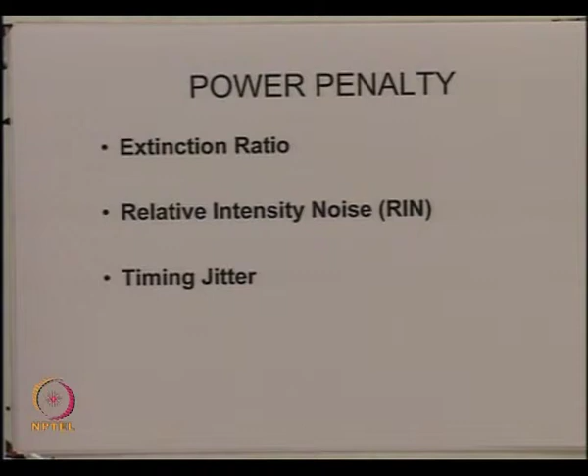So in this lecture, essentially we investigate each of these power penalties. Of course, when one power penalty we are investigating, we assume that the other degradations are not there. So at a time, essentially we account for power penalty due to one effect, and then we say total power penalty will be the sum of all the power penalties in terms of dBs.

So let us first look at the first power penalty, which is power penalty due to the extinction ratio. So here what we are saying is that when the 0 level of the data is transmitted, the optical intensity is not 0.

Now there are certain reasons for that in a practical system. Firstly, if you recall, when we talked about the optical detectors, we had something called the dark current. This is the current which is because of the ambient light falling on the detector. So even when no optical signal is transmitted, you will always have some light received, and that essentially gives you a small DC current corresponding to the 0 level of the data.

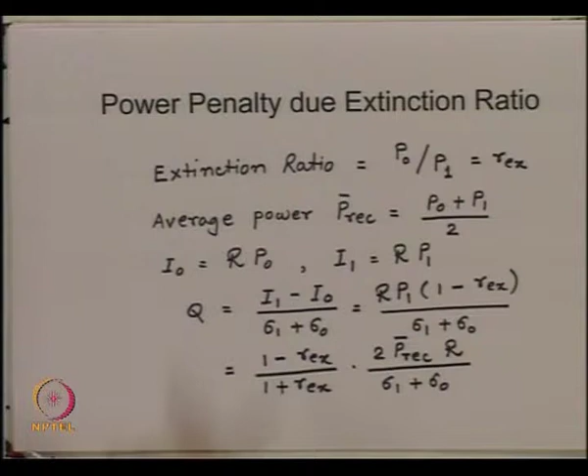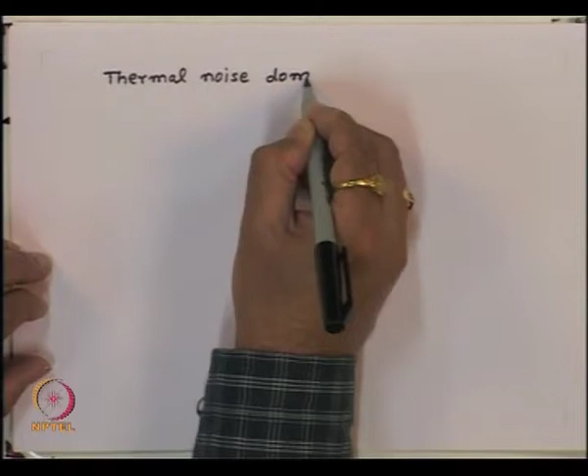Now, if we assume that the receiver is thermal noise dominated, then essentially the quantities sigma 1 and sigma 0 will be approximately equal to sigma t. So, under the assumption that my receiver is thermal noise dominated, we can get sigma 0 approximately equal to sigma 1, approximately equal to sigma t.

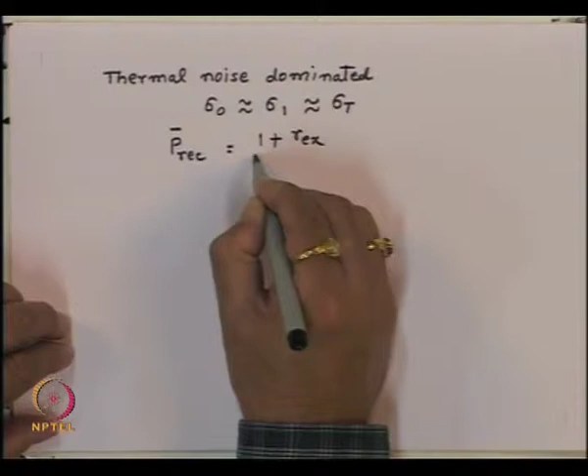And then in this situation, we can get the average power required. This we can get essentially by inverting this expression. So we can get the average power received, which is 1 plus REX divided by 1 minus REX, times sigma t Q divided by the responsivity.

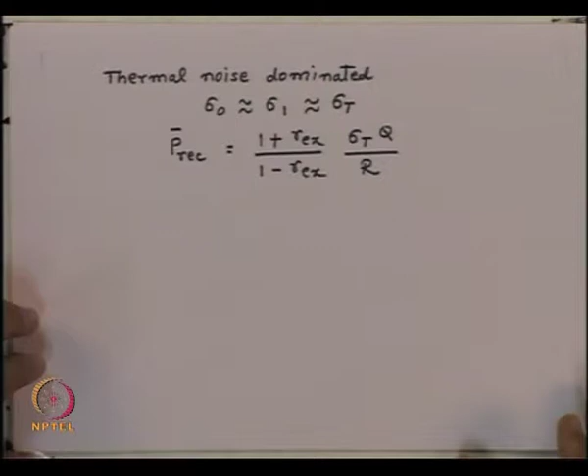So now, if the extinction ratio was 0, that is the ideal receiver, then we would require the average power in the data corresponding to REX equal to 0, which will simply be sigma t Q divided by R. Whereas now, when the extinction ratio is finite, you will require a little higher power P REC compared to the ideal situation.

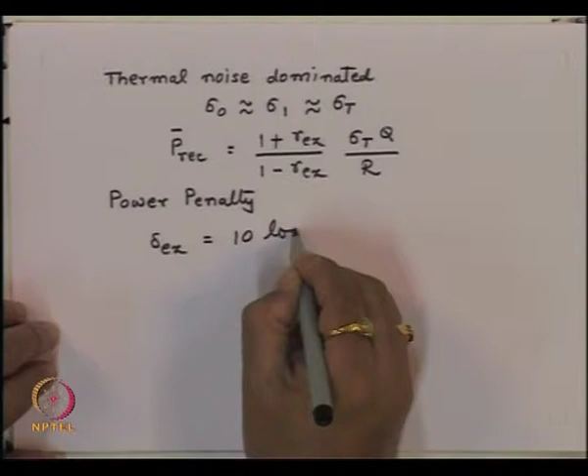So the ratio of P REC for a given value of REX compared to when REX was 0, we call the power penalty. So we can define the power penalty, denoted by delta Ex, which in dBs will be 10 log of P REC for a given value of extinction ratio divided by P REC for 0 value of extinction ratio.

So this quantity is a function of REX, that is what we are writing here. So substituting now for this quantity, P REC at 0 will be nothing but this. So we get the power penalty in terms of dBs, that will be 10 log of 1 plus REX divided by 1 minus REX.

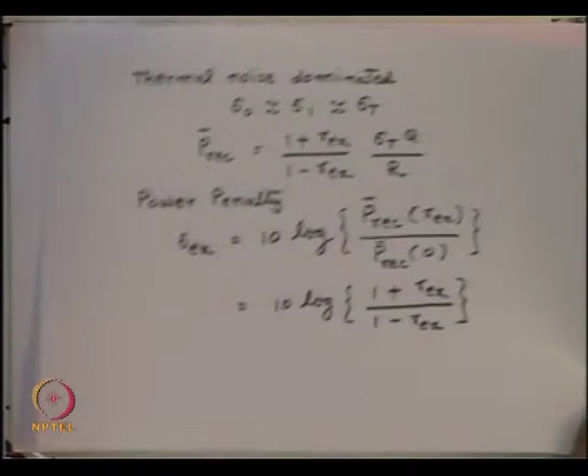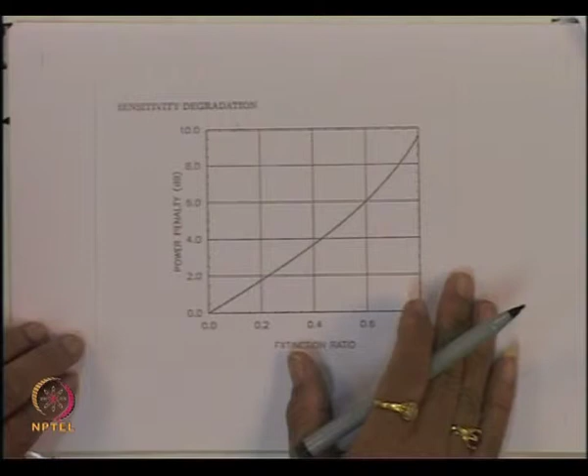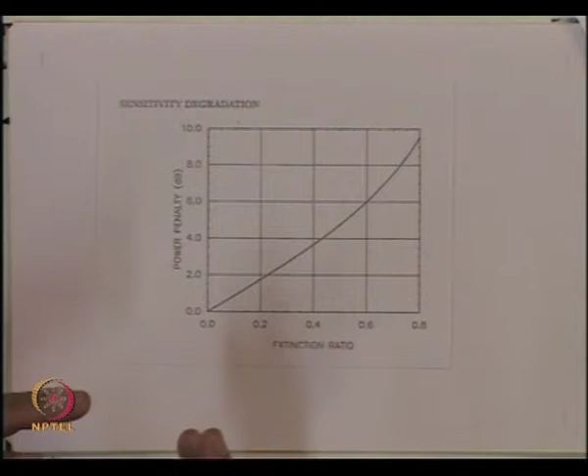As we can see, for an extinction ratio of about 0.2, we have a power penalty typically of the order of about 2 dB. And if you have extinction ratio of 0.4, then the power penalty is about 4 dB and so on. So if we say that for a receiver, the 1 dB power penalty is probably acceptable, then we can get the corresponding extinction ratio, that will be approximately 0.12.

So from this plot, we can get the numbers that this quantity delta extinction, that is equal to 1 dB for Rex of 0.12, and this will be as high as 4.8 dB for Rex is equal to 0.5.

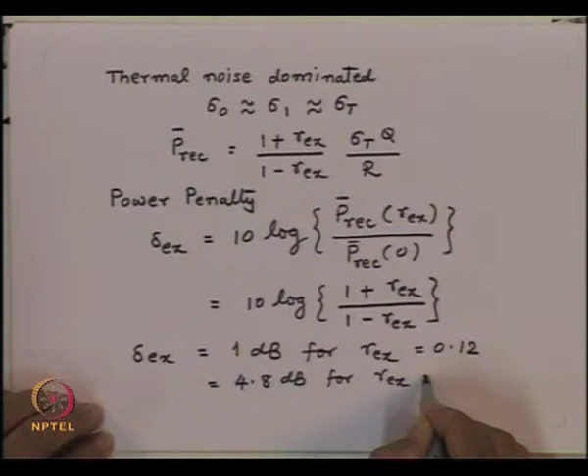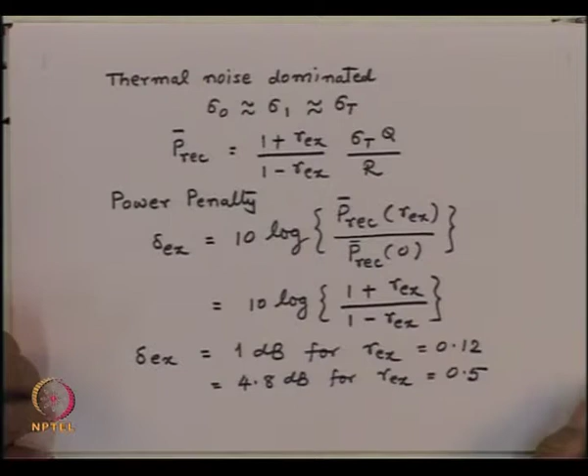Typically, the extinction ratio would lie in this range. So you will have a power penalty corresponding to the extinction ratio, which would be of the order of about a dB in the system. So this is one of the power penalties when we design a practical receiver.

The second power penalty which we have is the power penalty due to relative intensity noise. If you recall, if the pulse has to be transmitted like this, because of the relaxation oscillations and all other noise present in the laser, the signal does not go like that. The signal essentially goes something like this.

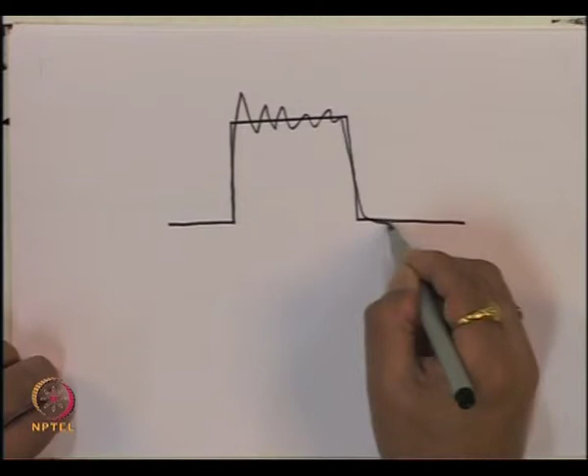So we are having some fluctuations in the optical intensity corresponding to the one level. This is the fluctuation which is called the relative intensity noise, and one can see that this effect essentially is a multiplicative effect, because this fluctuation which we are going to get into this amplitude will be proportional to the amplitude of the pulse.

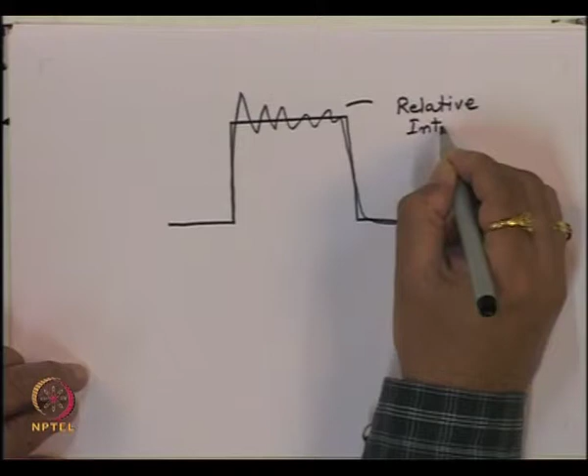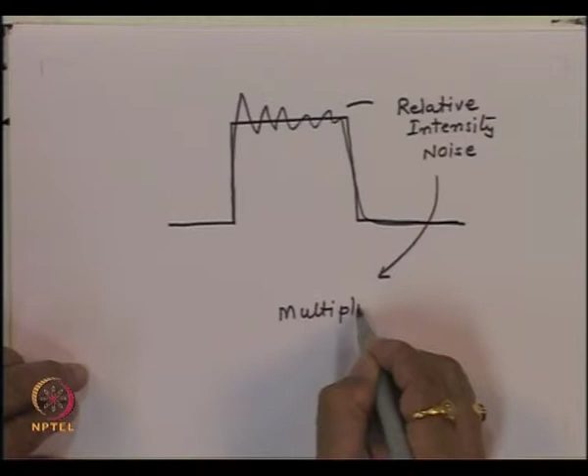So this noise, which is the relative intensity noise, is a multiplicative noise, because this noise is proportional to the amplitude of the pulse.

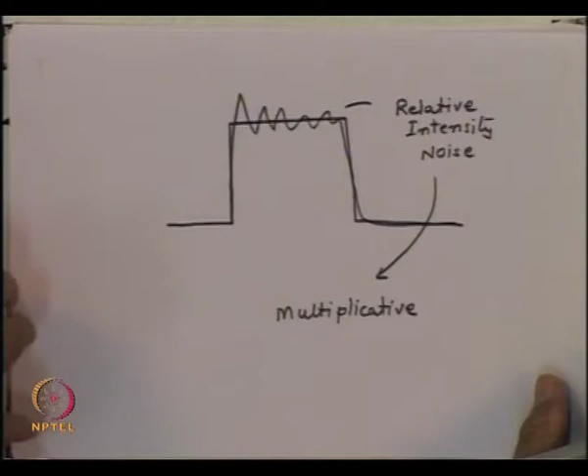So what we do is we define now the variance for the relative intensity noise, and then treat this noise in addition to the noise which is present because of the shot noise and the thermal noise. And then we can ask a question: because of the additional noise which is there due to the relative intensity fluctuations, what will be the extra power added to the system to get the same BER.

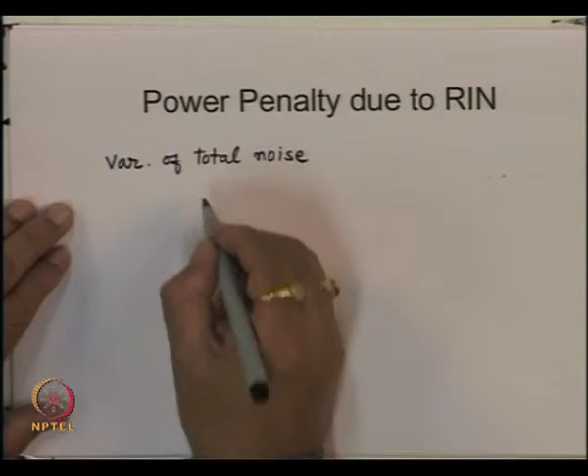So we define now the variance of the noise, which is sigma square. Let us say this is the variance of the total noise. Sigma square, that will be equal to sigma shot noise square plus sigma thermal square, plus the additional noise which is the relative intensity noise, which we denote by sigma I square.

Where sigma I we are denoting by the responsivity and the average value of the change in the input power. So this quantity is a root mean square value of the input optical power multiplied by the responsivity, that is this quantity which is the sigma of the relative intensity noise.

So this one we can say is the responsivity multiplied by your P in, into a parameter called the parameter for the relative intensity, where this Ri is defined as delta P in square to the power half divided by P in.

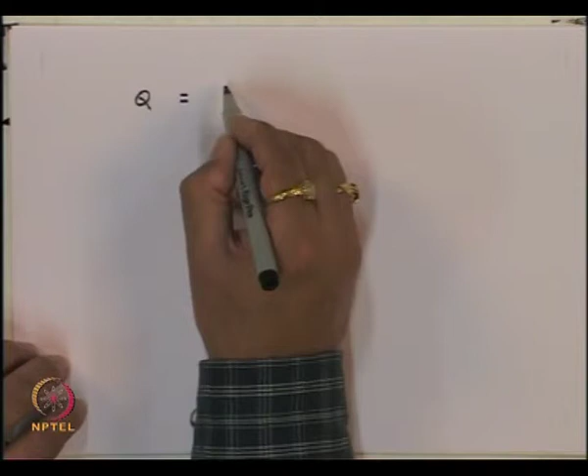Then the Q factor which we have for this case will be Q, which will be equal to I1 minus I0, divided by sigma 1 plus sigma 0.

Now when one level is transmitted, we have all the noises present: shot noise, relative intensity noise, and thermal noise. Thermal noise may be negligible compared to these, but for sake of completeness we can say that when one level is transmitted, all three noises are going to be present.

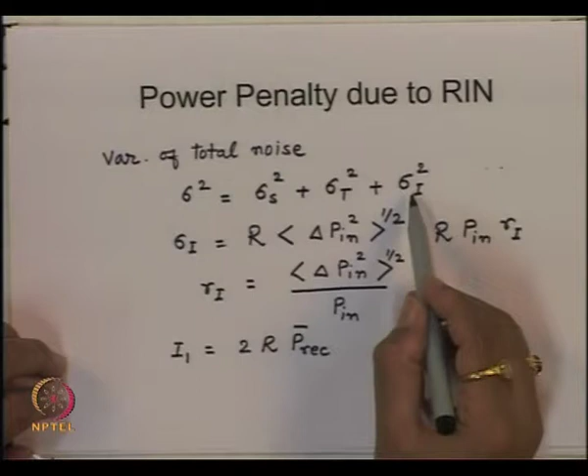Whereas when 0 level is transmitted, since the extinction ratio is 0, we do not have shot noise and we do not have relative intensity noise. So sigma 0 will be only sigma t. So we have a situation where sigma 1 will be square root of sigma s square plus sigma t square plus sigma I square, and sigma 0 will be only sigma t.

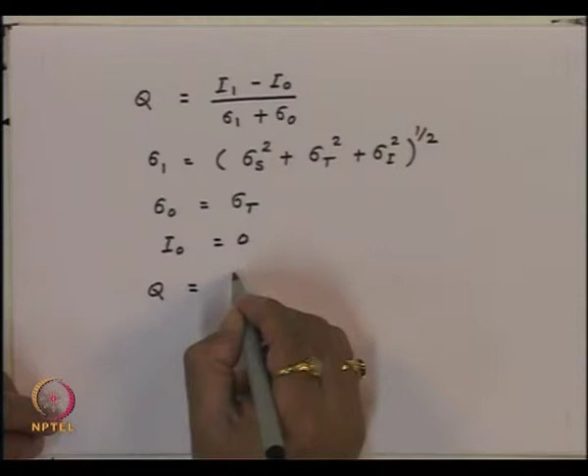And also, since we are assuming that the extinction ratio is 0, I0 is 0, so this quantity is also 0. So if you substitute these parameters, then you get this parameter Q, that will be 2 times R P average divided by this quantity, which is sigma s square plus sigma t square plus sigma I square to the power half, plus sigma 0, which is sigma t, so equal to sigma t.

And now if you write this value of sigma s with the shot noise, so sigma s is equal to 2 times Q responsivity average power into bandwidth to the power half. And we also have sigma I as we defined, that is equal to 2 times Ri, this is the relative intensity parameter, responsivity and P average.

So we can take this thing and substitute into this. And note here that we have a P REC which is here, and also these quantities are now depending upon P REC.

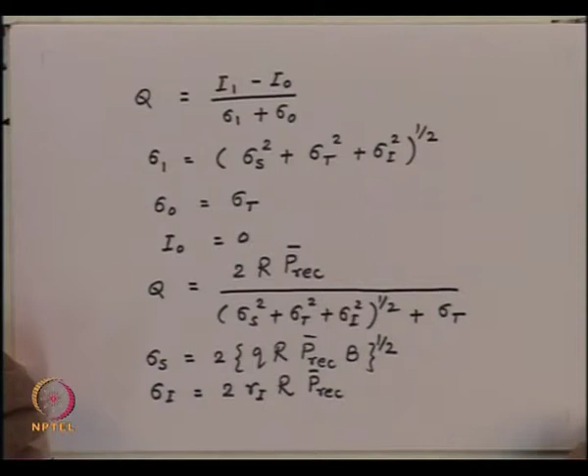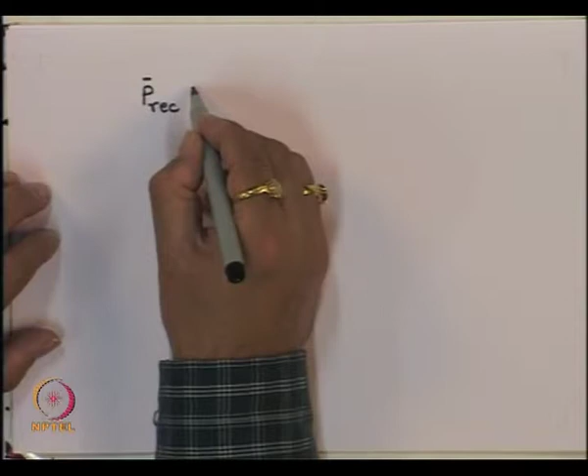So if we invert this and solve for P REC, we get the received power as a function of the parameter Q and the RIN intensity noise parameter Ri, that will be equal to Q into sigma t plus q B, Q square divided by the responsivity into 1 minus Ri square into Q square.

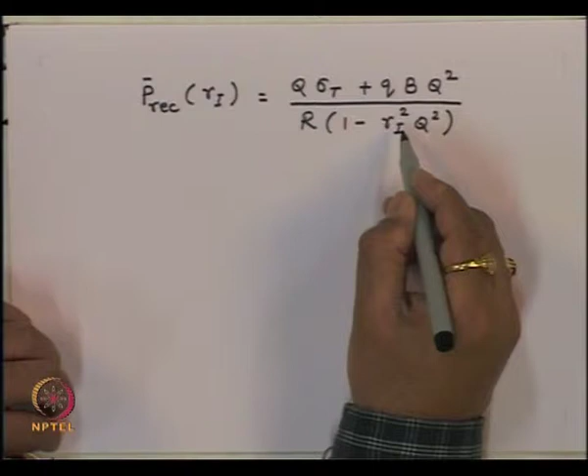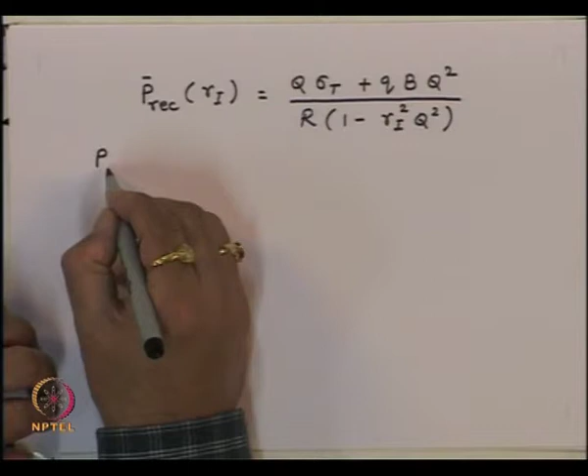Again, from this expression, if we substitute Ri equal to 0, then we get the required receive power in the ideal situation, when relative intensity noise is not present. In the presence of Ri, this quantity will be non-zero, and as a result we will require a little more power. So we can define the power penalty as the ratio of P received with Ri divided by P received when Ri is equal to 0, and in dBs, 10 log of that.

Let us call it delta I, that is equal to 10 log of P REC bar for Ri divided by P REC for Ri equal to 0. This term is same, so when we take a ratio, essentially this is the term which will cancel. So we get the power penalty, which will be 10 log of 1 minus Ri square into Q square.

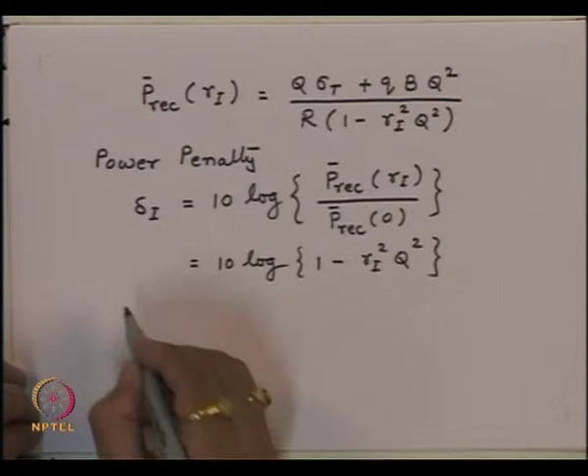Now for the acceptable level for the BER, this quantity Q has to be at least 6. So if we are working with a bit error rate of 10 to the power minus 9, Q will be about 6. So for BER of 10 to the power minus 9, Q is approximately 6. So if you substitute into this, you get delta I, that will be 10 log of 1 minus about 36 into Ri square.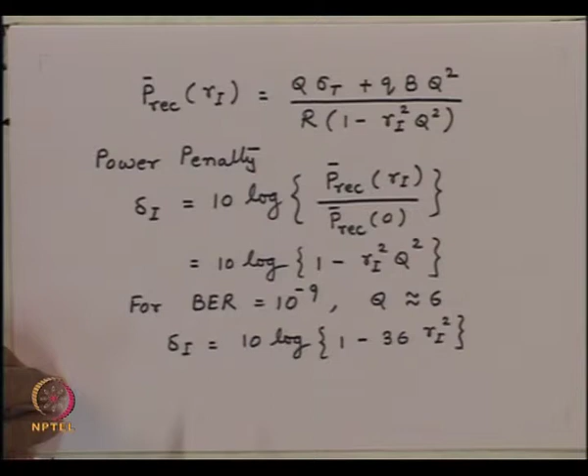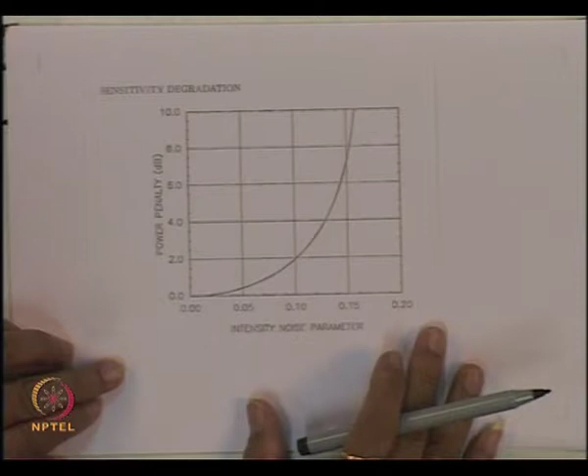We can plot this function again as a function of the relative intensity noise parameter, and the plot would look something like this. We have the relative intensity noise plotted, and here we are having power penalty in terms of dBs. So we see that as the relative intensity noise increases, the power penalty increases very rapidly, or in other words, the system degrades very rapidly.

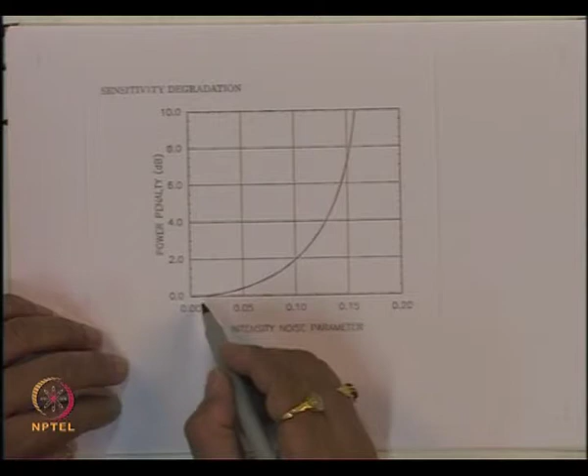Now note here, the noise which is indicated here is essentially indicating a value of sigma of the relative intensity noise. The peak to peak deviation of the noise is about 5 to 6 times sigma. That means one-sided deviation, if you take on the data, then you are having approximately 2.5 times sigma deviation of the signal corresponding to mean level on one side.

So when sigma is 0.1, essentially we have a peak to peak noise about 0.3 of this amplitude. If you make the sigma about 0.2, that time we will have the peak variation, which is about 0.6, and then you will see that there are a large number of values which will be lying below the threshold value, which is half.

And that is the reason as the sigma for relative intensity noise increases, very rapidly the system degrades, and that is what essentially is shown by this figure, that by the time you go to a relative intensity noise of about 0.15, the power penalty is as high as about 8 dB, and beyond that the power penalty essentially becomes unmanageable.

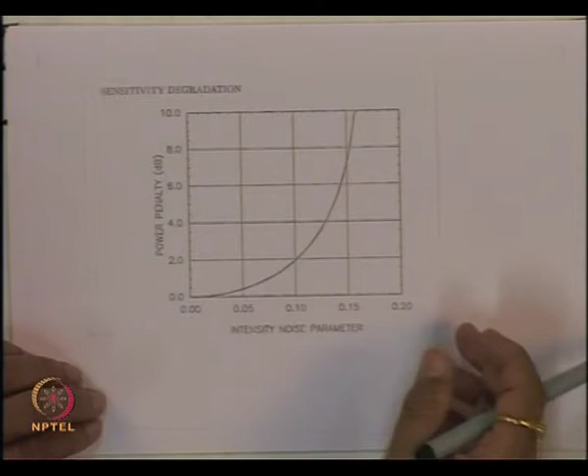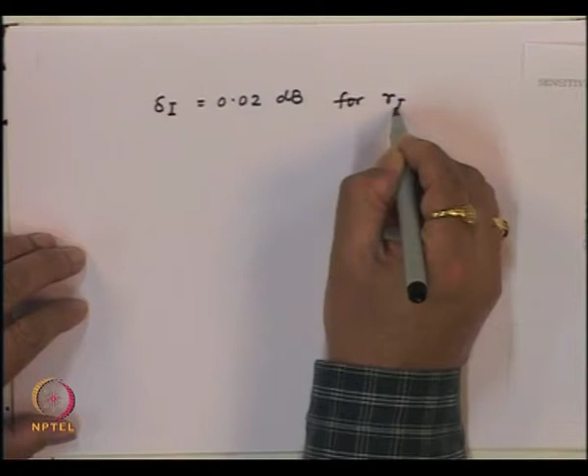So just to give a few numbers, if we write for this, let us say delta I equal to 0.02 dB for Ri equal to 1%, or 0.01, that is equal to about 2 dB for Ri about 10% or 0.1, and delta I equal to infinity for Ri equal to q to the power minus 1. As you see here, when this quantity Ri is q, 1 upon q, that time this quantity will be 0, and then this will be infinity.

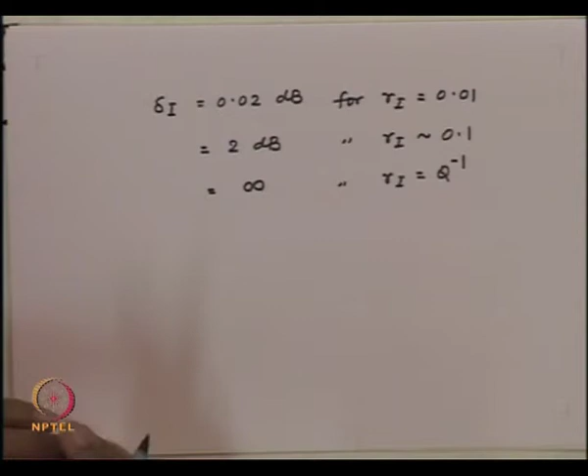So that means if you are having the relative intensity which is 1 upon q, then the power penalty is very high. That means your receiver can never perform satisfactorily, because now the power penalty is infinity. That means to get the bit error rate of 10 to the power minus 9, we have to essentially increase the power by infinite dBs. Or in other words, if the Ri becomes comparable to 1 upon q, then we will never be able to achieve the bit error rate we are desiring, which is 10 to the power minus 9.

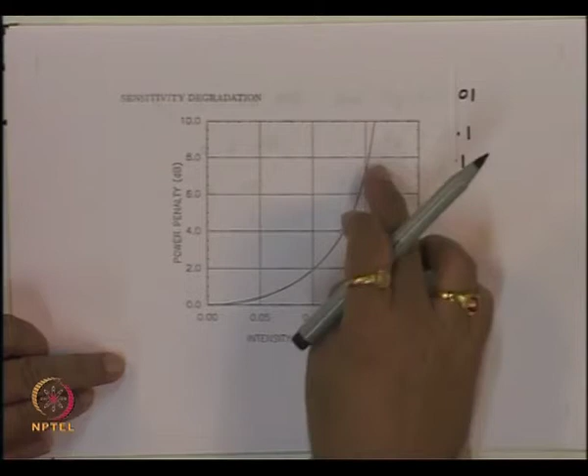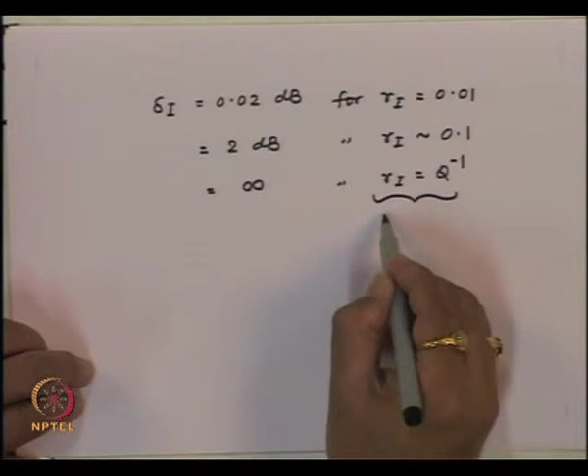That is what essentially is shown in this plot, which very steeply increases as the relative intensity noise increases. So we say that for this value, the receiver will never achieve the required BER.

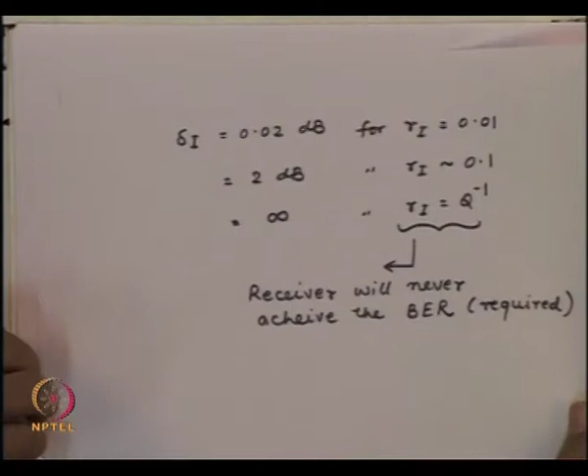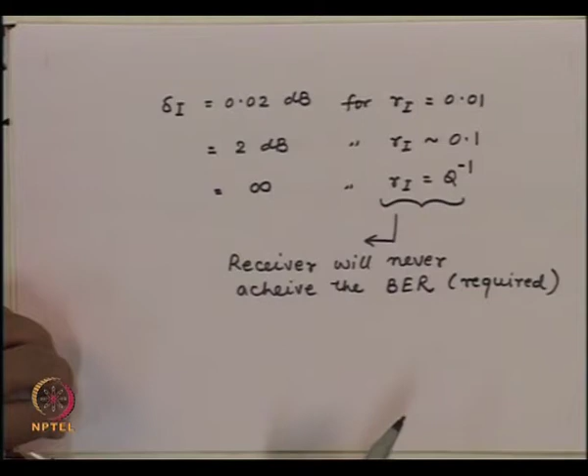So that is the reason when we talk about the noises, especially this is going to come from the laser, this noise has to be kept low, so that the power penalty is again within the specified limit. Or in other words, if we say that maybe about a dB of power penalty is okay, then the relative intensity noise should remain of only a few percent level. Otherwise, the power penalty will be excessively large.

The third power penalty we are seeing now is what is called the power penalty due to timing jitter. Firstly, one can ask a question: why does the timing jitter give a noise which will affect the bit error rate.

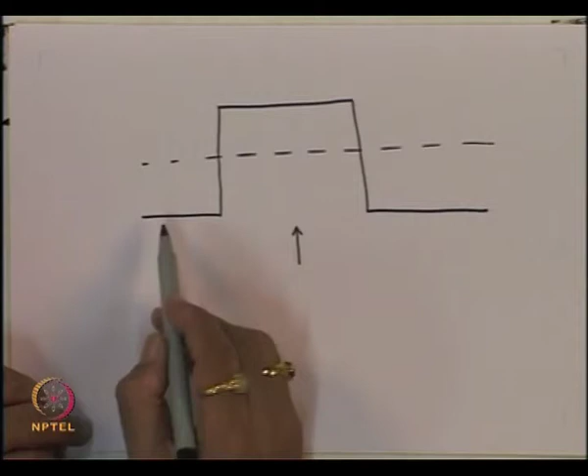One can again go back to the data. Say we have a pulse which is like this: after all, when the pulse is detected, we have a sampling time at which essentially we ask whether the signal is below threshold or above threshold, and depending upon the decision, we assign the level either 0 or 1. So if you are having a pulse which looks like that, even if you are having a small jitter in the clock, meaning this pattern wobbles a little bit, it doesn't make any difference because you are always going to sample this amplitude.

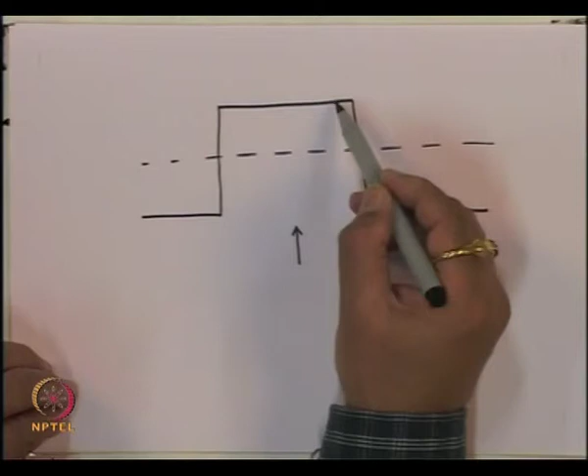However, what happens in practice, because of the finite bandwidth of the system, we have now a pulse which is rather distorted. Also, to reduce the intersymbol interference, we may not transmit a pulse which is rectangular in shape; we may have some other form of the pulse. So let us say the pulse which is transmitted, or which has become after distortion, looks something like this.

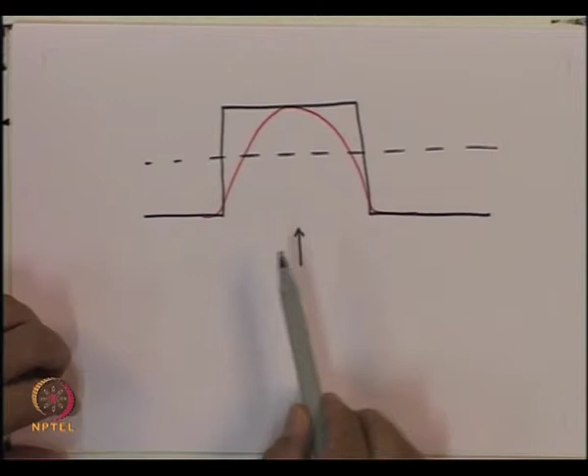Something like this, and then over and above, the noise is superimposed on this. So now if we are having a timing jitter, that means on this function, the sampling point essentially is having a random fluctuation. That means sometimes we sample here, sometimes we may sample here, sometimes we may sample here, and so on.

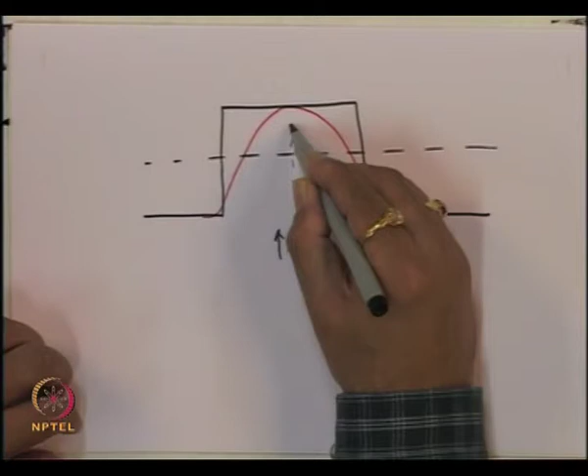Now, since this function is not constant over this time when I am sampling, when I sample here, we get an amplitude which is this. Whereas if we sample here, meaning if my clock had drifted a little bit, then we sample the amplitude which is this. What that means is that we are now having a random fluctuation in the intensity or amplitude of the signal because of the jitter in the clock or jitter in the sampling time.

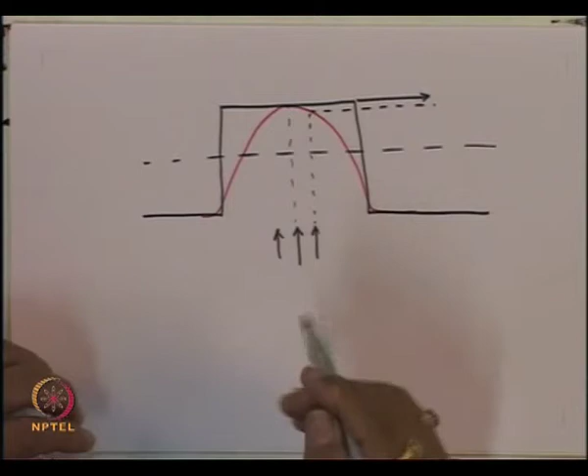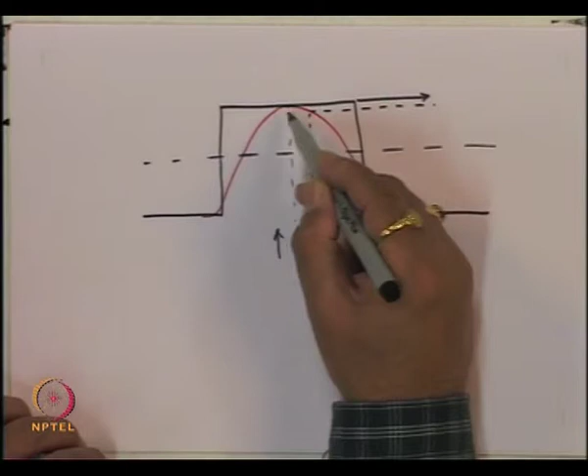So the sampling time jitter essentially gets converted into corresponding amplitude fluctuations. Basically what we are seeing here is that the statistical fluctuation in the sampling time or in the clock gets converted into equivalent relative intensity noise, because how much fluctuation you get will depend upon the amplitude of the pulse. So we have here equivalent relative intensity noise, because of the fluctuation in the sampling time.

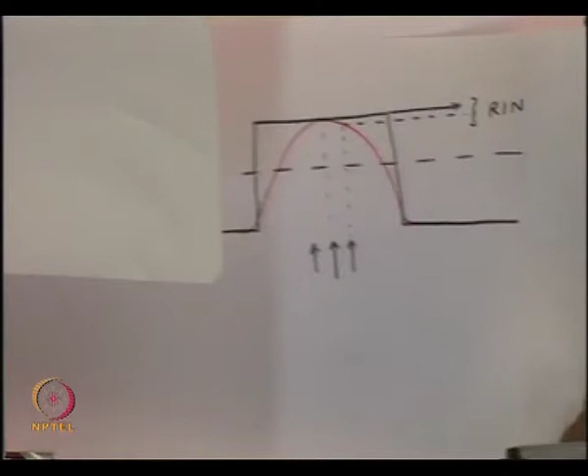So now we can define the parameter, assuming that the current is 0 corresponding to 0 level, and thermal noise is also small, there is no thermal noise and all that. We can define this parameter Q, which will be I1 minus this quantity delta I due to jitter, value divided by sigma t squared plus sigma j squared, where sigma j is the noise because of the jitter, or converted into corresponding relative intensity noise, 1 by 2 plus sigma t. Here sigma j is the RMS value of the fluctuation of the current due to the sampling time fluctuation.

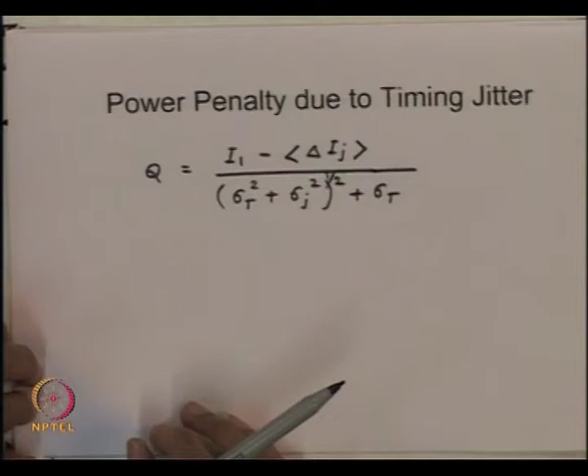Now obviously, what fluctuation we get in this and its statistical variation will depend upon the shape of the pulse. So if you have a pulse shape which is rectangular, then obviously there is no fluctuation in this, so we do not have any jitter noise. Whereas if you have a function which looks like that, then we will have the corresponding jitter noise. So essentially what we are saying is, because of this fluctuation here...

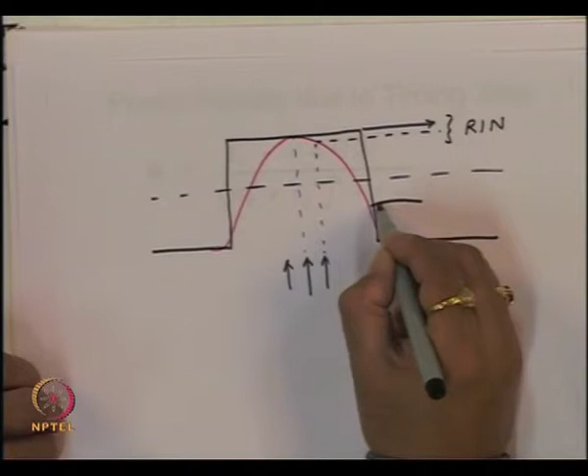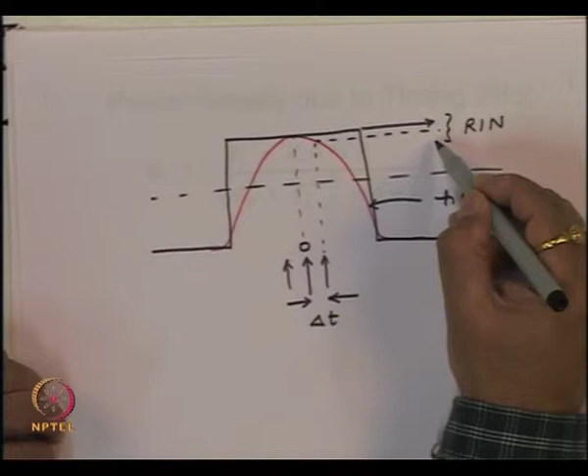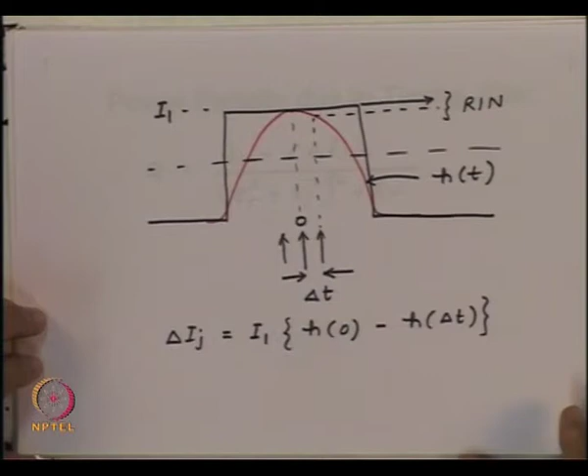Let us say this function is given by h of t, and let us say the fluctuation we have in sampling is given by delta t, and let us say this is the peak, the time which corresponds to 0. So I measure at the peak, this is the best sampling time, and because of the jitter I can sample on either side, and the time deviation could be delta t. So then the amplitude change we get here will be essentially delta i jitter, that will be I1, which corresponds to this level, into h of 0, that corresponds to t equal to 0, minus h of delta t. So this function h of t is the one which essentially gives me the change in the amplitude.

So this quantity which we got here is nothing but delta I jitter.

Now we can choose different pulse shapes. Either the pulse shape could be cosine square, but generally for the reduction of intersymbol interference we use this pulse shape. So let us say I use this function which is the cosine square function. So we get h of t is cos square of pi b t by 2, where this quantity is the bit rate. So the pulse is no more a rectangular pulse now, the pulse has a shape which is cosine square shape.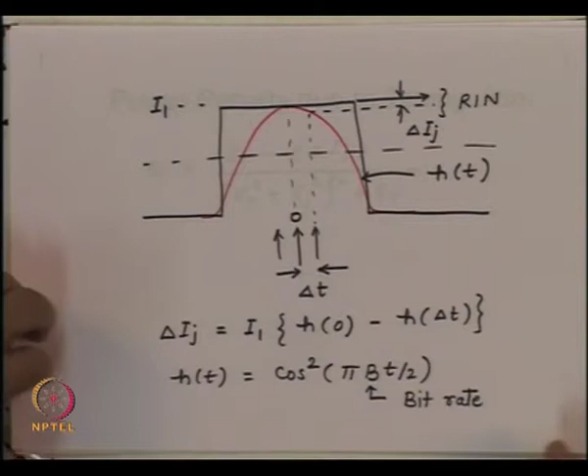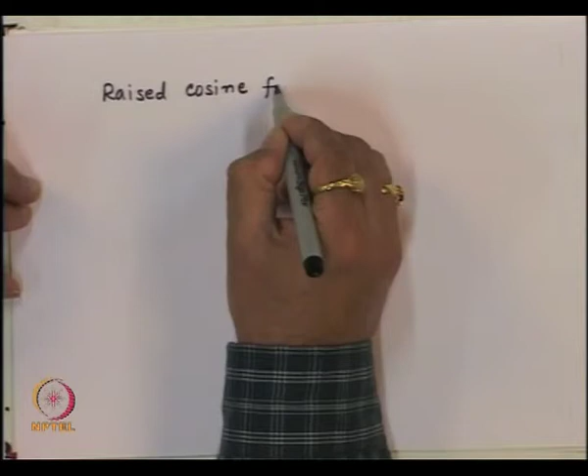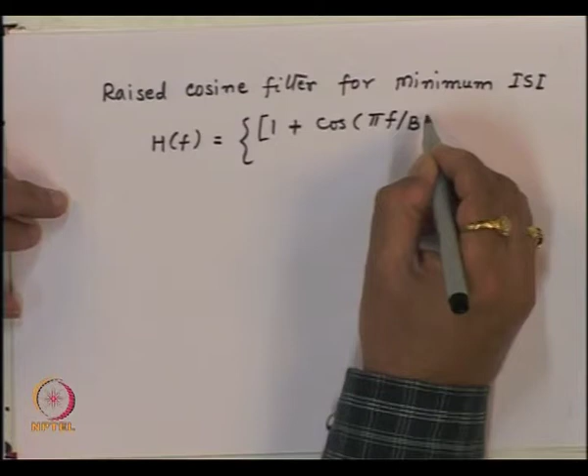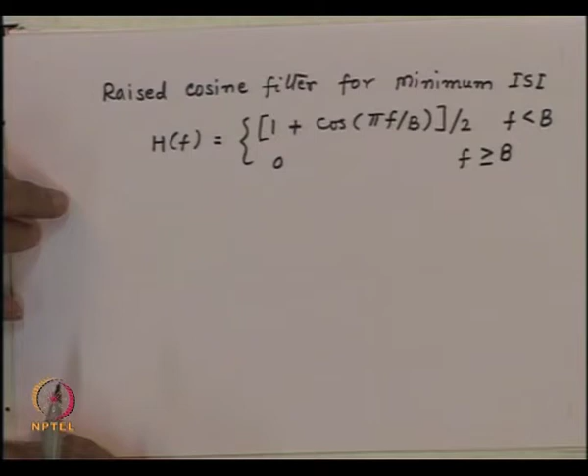And the corresponding transfer function you write, which reduces the intersymbol interference, gives us the raised cosine filter for this pulse shape. So we get the raised cosine filter for minimum intersymbol interference, ISI. If you do that, then the transfer function for this receiver would be given as 1 plus cosine of pi f by b, by 2, for frequencies less than b, and equal to 0 for frequencies greater than or equal to b. So this is the filter normally used in the receiver to reduce the intersymbol interference.

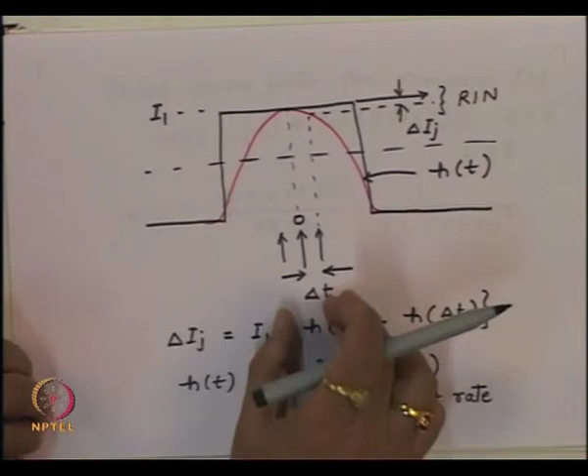And for this we can get the function called the impulse response h of t, which is given by sine of 2 pi bt divided by 2 pi bt, into 1 upon 1 minus 2bt squared. So assuming that now b into delta t, which is the time fluctuation, is small compared to 1, what we are essentially saying is compared to the bit duration, if the time fluctuation is small, so delta t is much smaller compared to this bit duration, that is given by the condition when b delta t is much less than 1.

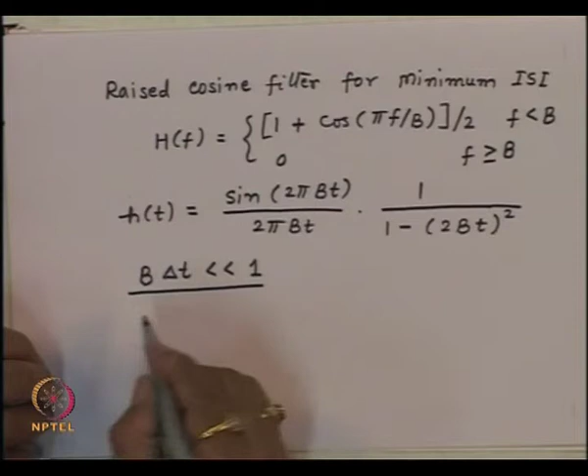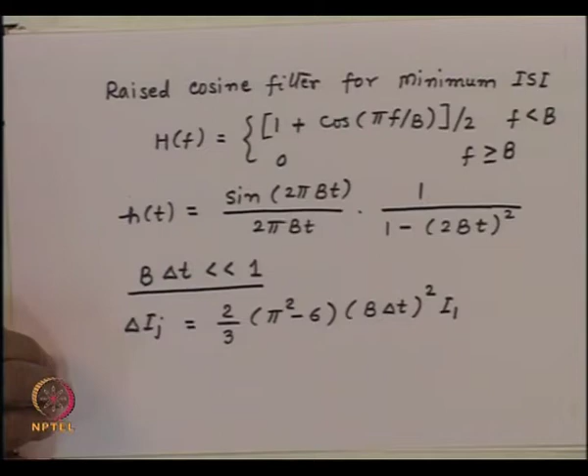We can get the change in the current for this pulse shape, that will be equal to 2 upon 3 pi square minus 6, into b delta t whole square, into the mean current level I1. So, you have this quantity delta ij, that is what we are trying to find out for this function, and I1 is the current corresponding to one level. So, that is now the fluctuation which we have.

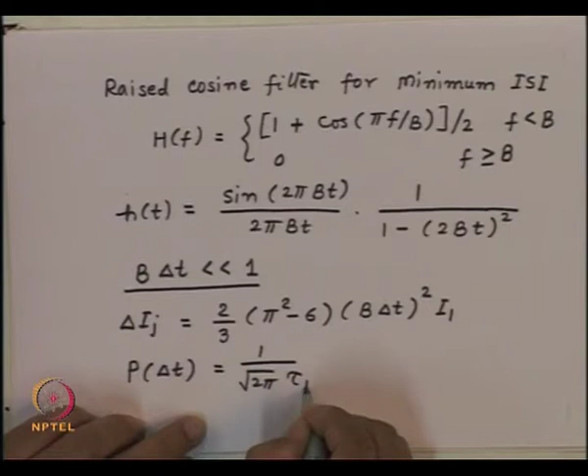Assuming that the distribution of this fluctuation is Gaussian, then we can calculate the density function as a function of delta t. That will be given by 1 upon root of 2 pi. Let us say tau j is the standard deviation of the fluctuation of the sampling time, e to the power minus delta t square divided by 2 tau j square.

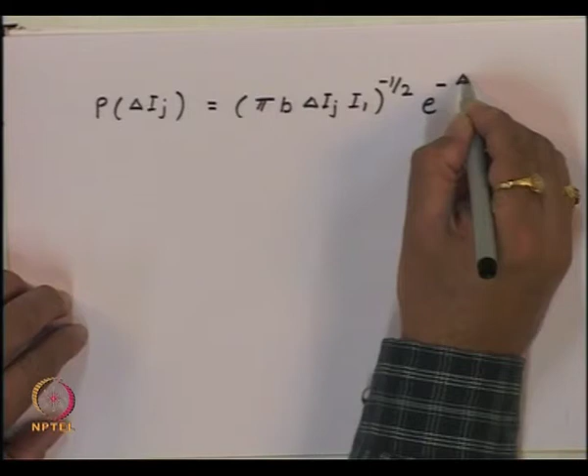And we can find out the corresponding density function for the current for this. So, we essentially get the density function for delta I j, that will be equal to pi, some parameter which we define, b delta I j, I1 to the power minus half, e to the power minus delta ij divided by b I1, where this parameter b is 4 by 3 into pi square minus 6 into b tau j square.

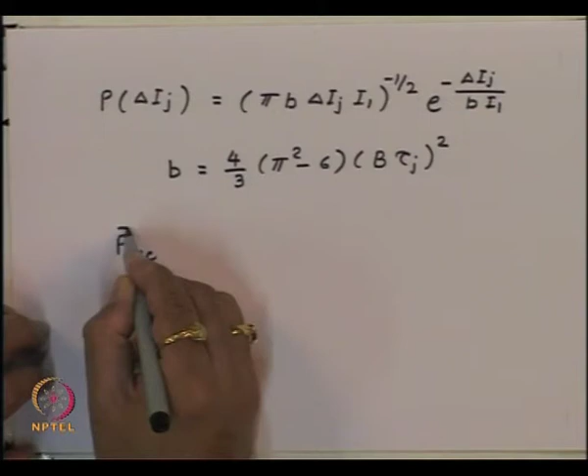So, once I have this density function for the current, we can go back and substitute into the noise expression. We can find out what is the relative intensity noise produced because of the timing jitter. So, if we do that, we get the received power P for a given Q. And this will depend upon this quantity here, which depends upon tau j, which is the standard deviation of the timing fluctuation or jitter in the clock.

So, this is now going to be a function of this parameter b, that is equal to sigma t into q divided by responsivity r, into 1 minus b by 2, divided by 1 minus b by 2 whole square minus b square q square by 2.

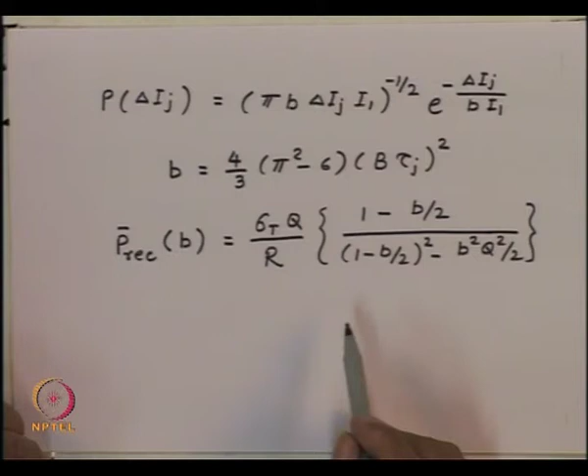So, again by substituting this quantity b equal to 0, we get the power required in the ideal situation. So, we essentially have the PREC corresponding to b equal to 0, that is the ideal condition, and because of the finite value of b, which is related to the variance of the timing jitter, we get the corresponding power penalty. So, we can define the power penalty delta j, that is 10 log of the same thing, which is P received for B divided by P received when B equal to 0.

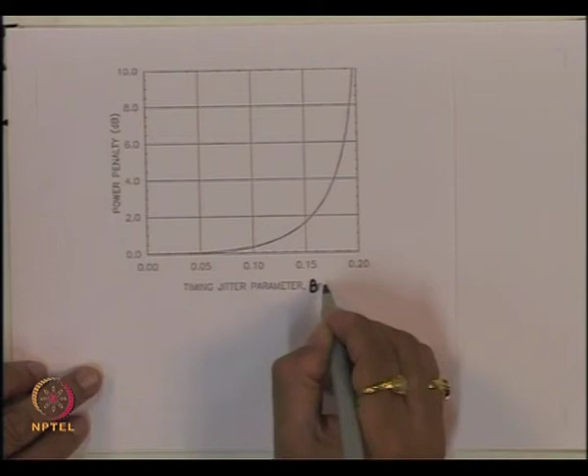So, essentially if you take 10 log of that, that will give me the corresponding power penalty. So, if you plot this function as a function of the timing jitter, or this product b into tau j, we have a parameter here b into tau j, and we have a corresponding power penalty which is plotted here.

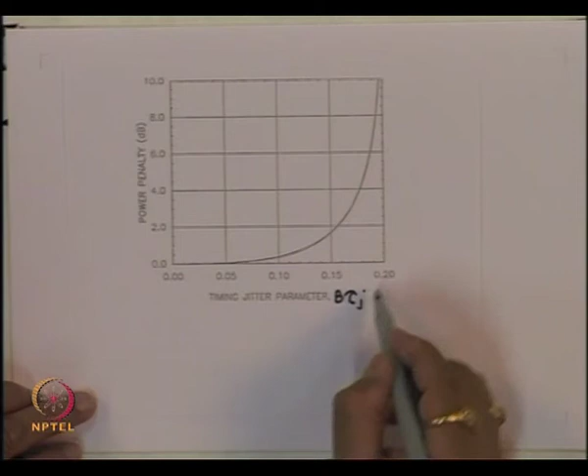Again we see here the power penalty increases very rapidly, and by the time we have this product about 0.2, the power penalty practically becomes infinity. And we can see this from the eye diagram, that if the sigma of this quantity is about 0.2, that means the clock peak to peak wander will be over the bit duration, and then the pulse will not be sampled properly.

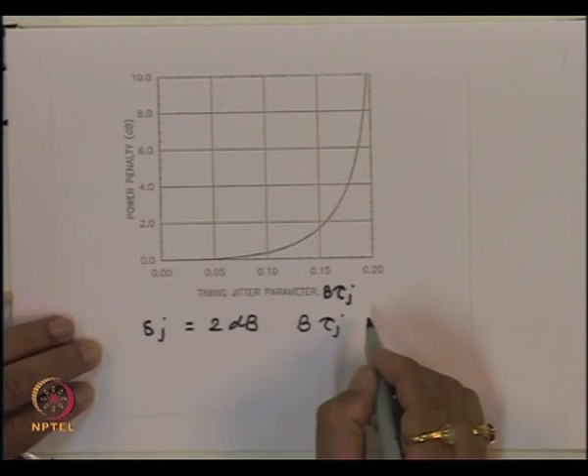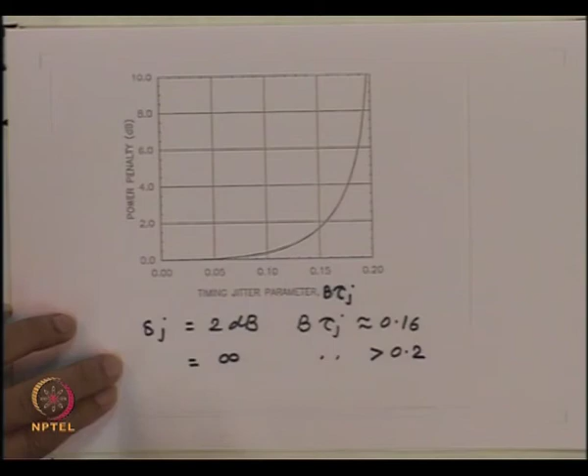So, we can see from here that for delta j of about 2 dB, this parameter b into tau j should be approximately 0.16, and as we saw, this will become infinity when this parameter is greater than 0.2. So, essentially what we are saying is timing jitter should be small, and a value of about a few percent timing jitter may be acceptable to give you a power penalty of between 1 and 2 dB.

So, what we have seen in this lecture is that because of the non-ideal situation of the optical receiver, like a finite extinction ratio, the relative intensity noise because of laser fluctuations, and timing jitter, you have to add extra power into your system to achieve the same bit error performance. So, we have seen three major parameters or effects which contribute to the power penalty. The total power penalty will be the sum of these power penalties, and that is the reason when we design an optical link, we have to take this into consideration and supply more power to the system to overcome these power penalties, so that we can get satisfactory receiver performance.